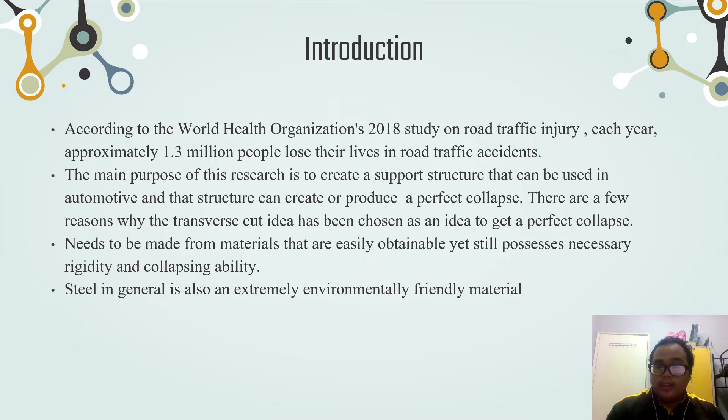Due to this, mild steel is selected for its appearance as well as ease of manufacturing and sustainable characteristics. Steel, in general, is also an extremely environmentally friendly material due to steel being easy to recycle as well as not being toxic to both the environment and humans. We can conclude that a square tube with multiple transverse cut is the best solution to get perfect collapse.

Nonetheless, if one is going to crash, we want to have the highest chance of surviving possible, because surviving a crash is all about absorbing kinetic energy. As energy absorbers, tubular structure components of various shapes and materials have been widely used. When deforming under compression in impact circumstances, they have the potential to collapse and transform huge amounts of kinetic energy into plastic strain energy. As a result, there is an increasing interest in installing energy absorbing devices with greater capability to protect people from injury.

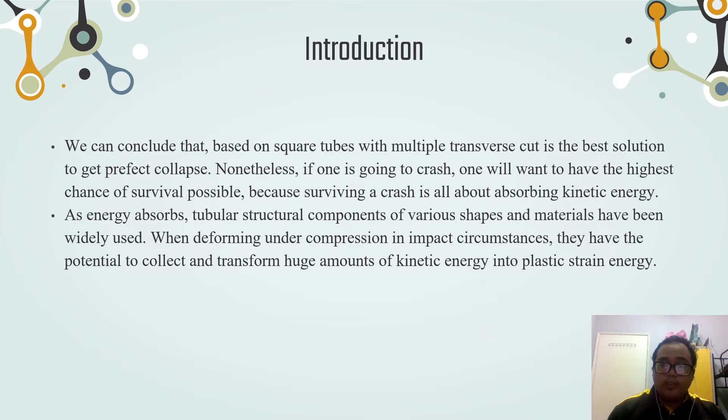Next, literature review. Under lateral stress, bending collapse is a significant energy dissipation mechanism for thin wall beams. Researchers have conducted numerous studies on the bending collapse of thin wall beams. Kecman proposed the first theoretical model for the pure bending collapse of rectangular section tubes in 1983. Then, in 1994, Wierzbicki used their traditional axial collapse theory to construct a hypothesis for bending collapse of rectangular beams. Following that, Kim and Reid improved Kecman's theory and found a closed-form solution for the bending moment.

All of these theoretical models, however, can only cope with pure bending of thin wall beams. The problem with this structure design is that when a strong bending moment is applied, they are prone to localized plastic collapse due to their thin wall.

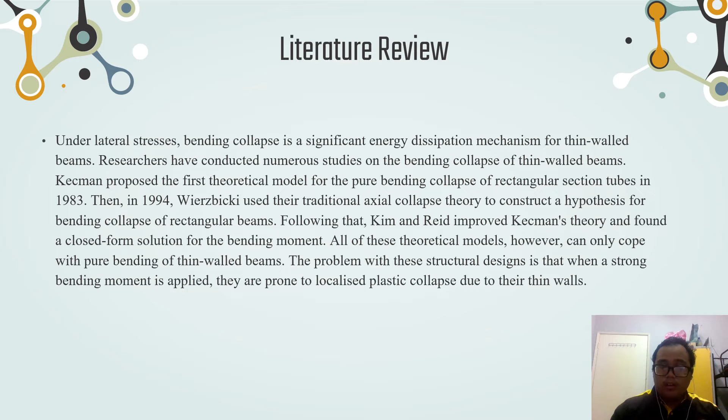In 2020, there was research on the bending collapse of multi-cell aluminum/CFRP hybrid tubes. The purpose of this paper is to look into the bending collapse and crashworthiness of multi-cell aluminum/carbon fiber reinforced plastic hybrid tubes under quasi-static and dynamic loads.

Other than that, there is research on bending collapse modes of an innovative sandwich panel with metallic foam core. Using the powder compact melting technology, a new approach was provided for the fabrication of aluminum foam-based sandwich panels with stainless steel wire mesh grid employed as a reinforced skin in this study.

In addition, three-point bending tests were performed in the multi-cell aluminum and innovative sandwich panel research. The Young's modulus of a material in the shape of a beam is measured using a three-point bending test.

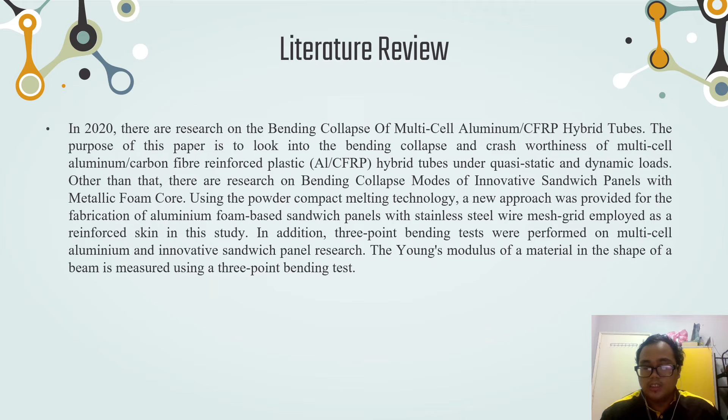Next, problem statement. When tubular structures bend, they frequently experience deep bending collapse. The collapsing point is usually in the center of the tube, also known as the hinge line. Except for the hinge line, the remaining part of the tube rotates as a rigid body during collapse. As a result, the majority of the tube parts are inefficient at absorbing kinetic energy.

Increasing the number of folds could possibly increase energy absorption, so the energy absorption efficiency can be maximized. By using two transverse cuts, we need to have three folds or points of bending. Based on the preliminary analysis of the transverse cut on the model, it appears that there is only one fold on the model, and also the fold happened on the first cut, not the center of the bending. For this study, in order to get threefold bending, we need to manipulate or adjust the size and the location of the transverse cut.

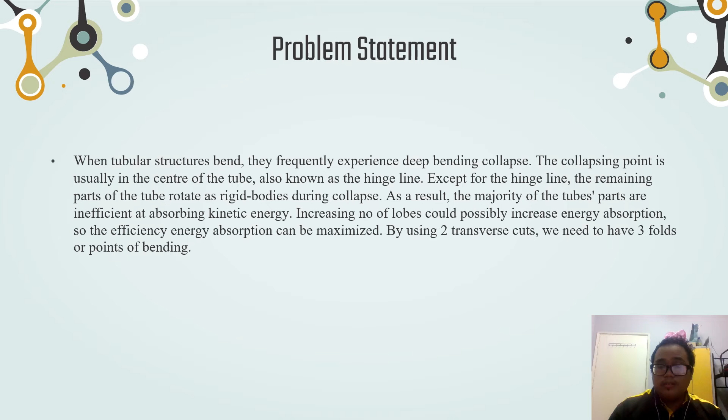Next is objective. Based on the discussion of the problem statement, there are a few objectives that must be met in order for this study to be successful. First, to develop a square tube model with a few transverse cuts using finite element analysis software known as Abaqus. Second, to analyze and optimize the amount of energy absorption from the data that has been obtained from Abaqus with the help of the MATLAB software. Third, to propose multiple transverse cuts to increase the number of folds, thus to improve the energy absorption capacity.

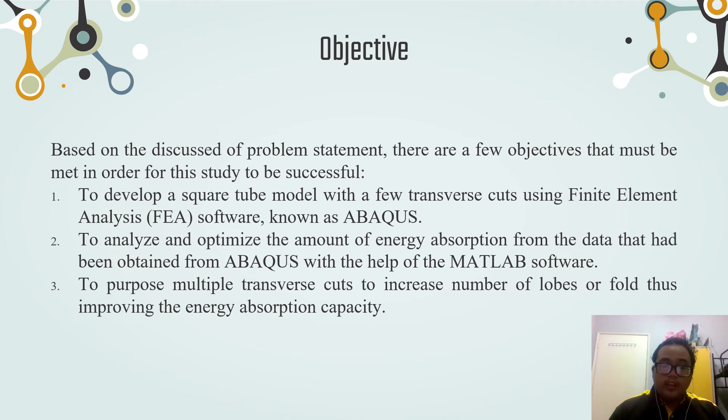Next, scope and limitation. First, to create three bending points and to make sure that the new folds that have been produced are in sequence. The variables that have been manipulated for multiple transverse cuts are the location and size of the transverse cut. The material that we use in our project is mild steel. For my final year project, I need to conduct my study in a lab, but due to COVID-19 as it is happening right now, my study will be conducted using MATLAB and Abaqus software.

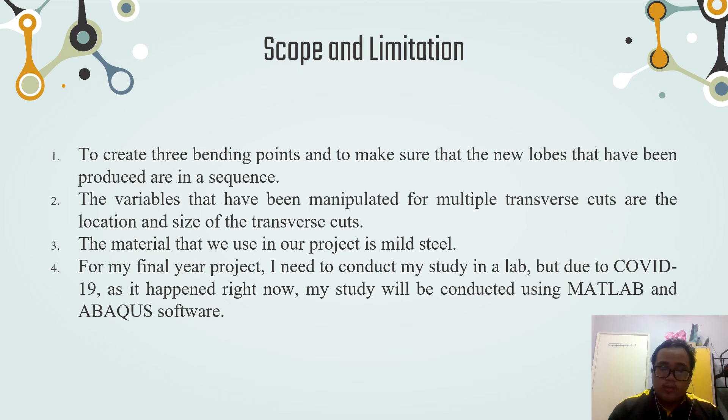Next is methodology. By using Abaqus, a model was developed. A material was selected for the construction of the model. In this case, mild steel was selected. Initial runs were conducted to perform FEA analysis of the constructed model. One fold should appear in the initial test. After one fold was achieved, the dimension of the transverse cut upon the square tube was remodeled to achieve three folds. This is done by adjusting the height of cut, the thickness of tubes, and others. The mesh was refined once three folds were achieved for a much more accurate simulation. Once three folds were achieved, the data of the model is transferred from Abaqus to MATLAB to calculate and generate energy absorption data.

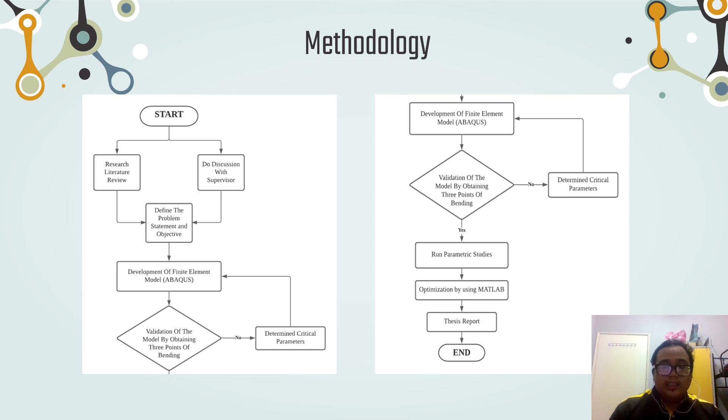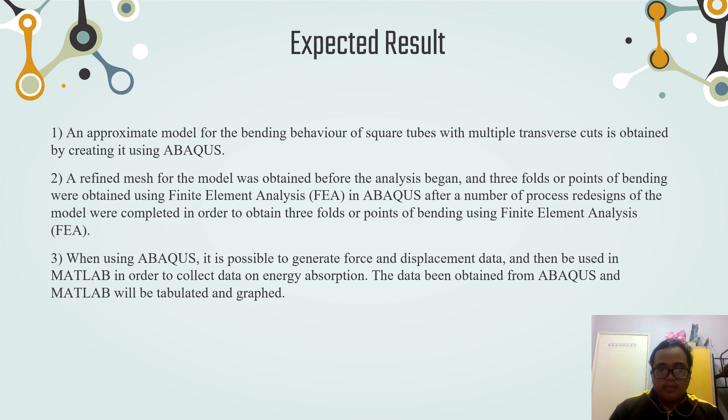Lastly, expected result. An approximate model for the bending behavior of a square tube with multiple transverse cuts is obtained by creating it using Abaqus. A refined mesh for the model was obtained before the analysis began, and three folds or points of bending were obtained using finite element analysis in Abaqus after a number of redesigns of the model were completed. When using Abaqus, it is possible to generate force and displacement data, which can then be used in MATLAB to collect data on energy absorption. The data obtained from Abaqus and MATLAB will be tabulated and graphed.